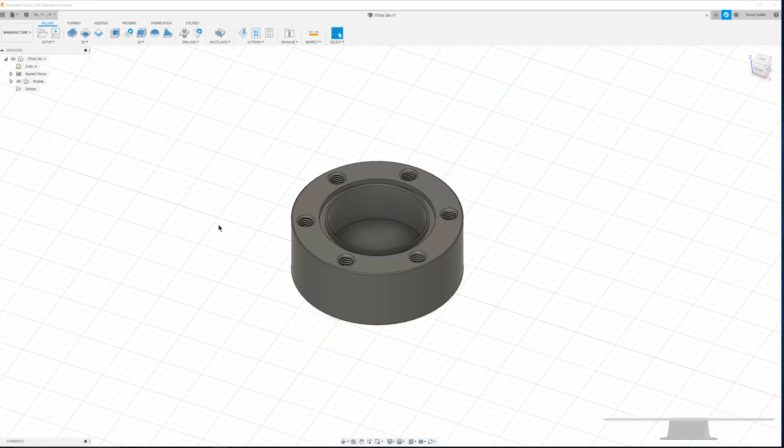Hi everyone, this is Nicole with Titans of CNC Academy, and in this video I'm going to show you how to program the TITAN-3M for the Tormach.

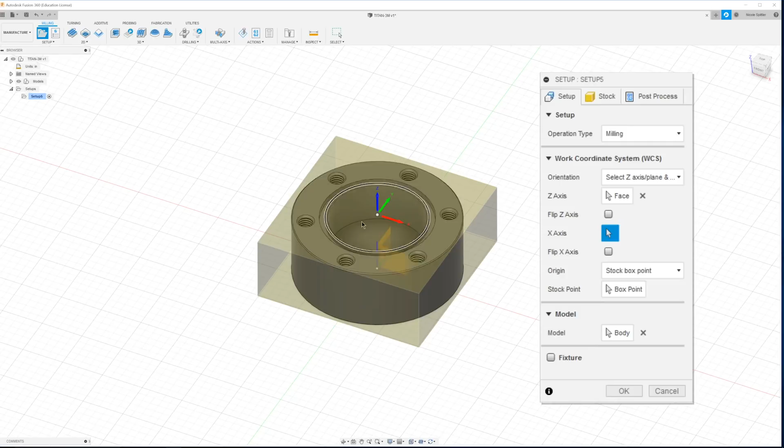To begin, we need to set up our stock, so I'm going to click Setup up here. We need to change our orientation to select Z-axis plane and X-axis. For our Z-axis, I'm just going to select this top face. For our X-axis, since there are no lines or edges going along X, I'm just going to zoom out and you can see our origin actually grows, and I can now select that for our X-axis.

Next, I want to change our origin to stock box point, and with stock point highlighted blue, I want to select this back left point. Next, in our stock tab, I want to make sure our mode is set to relative size box, and our stock offset mode is going to be add stock to all sides. Now I'm going to add 0.025 to each of our sides, both on X and on Y.

For our negative Z, I'm going to add 0.23, and for our positive Z, I'm going to add 0.02. And you can see our stock dimensions are 2 by 2 by 1. And now I'm going to click OK.

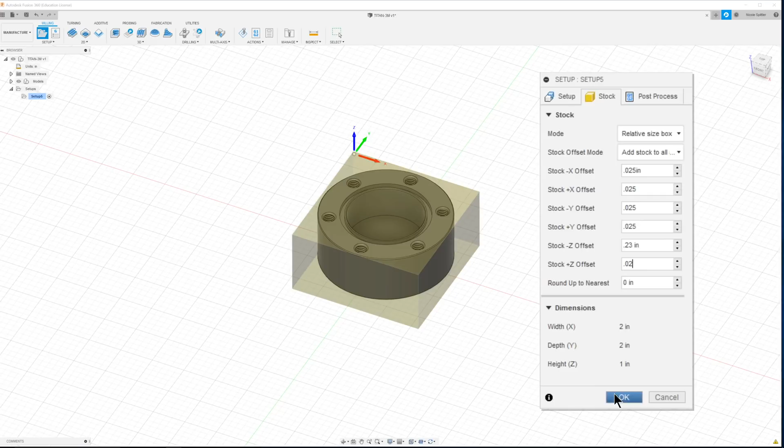The next thing we want to do is face our part, so to do that I'm going to come up to 2D and down to face. We're going to select our tool from the library. The tool we want is the 1.5 inch face mill that we created in the TITAN-3M Tormach video. Click OK.

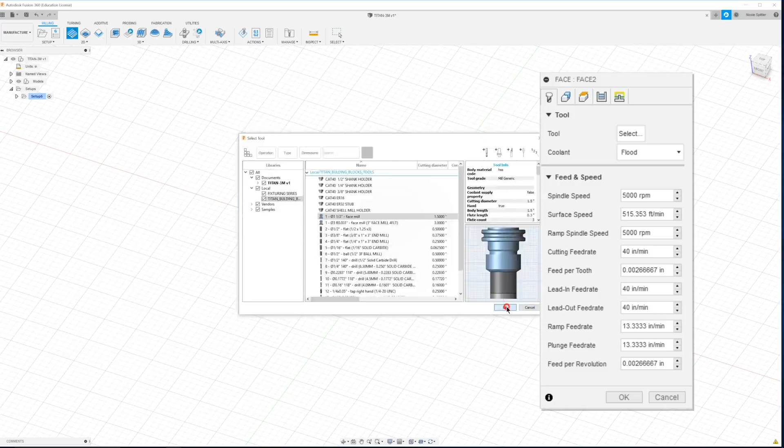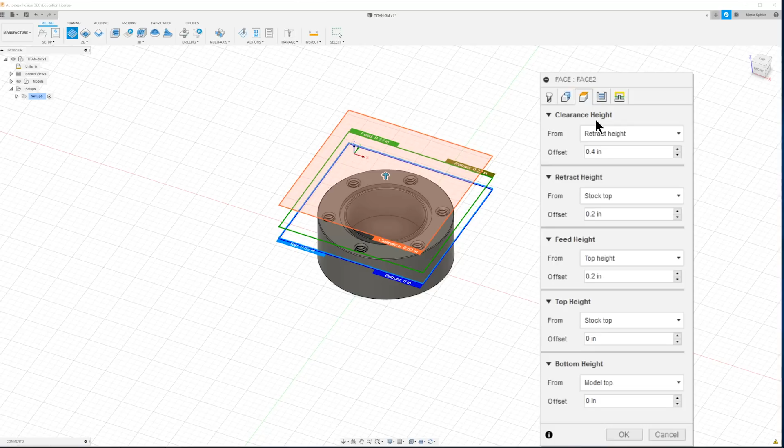I'm going to change our RPM to 4,000, and our cutting feed rate to 20 inches per minute. I'm going to do my lead in, lead out, ramp, and plunge all 20. We don't need to select anything in geometry, so I'm just going to move on to our heights tab. In here, I'm going to change everything to model top.

And in our passes tab, I'm going to change our pass direction to 180 degrees, our pass extension to 0.76, and our step over to 1.4. Our direction we are going to set to climb, and now we can move on to our linking tab. In here I don't really need to change anything. I am going to uncheck our lead in and our lead out and click OK.

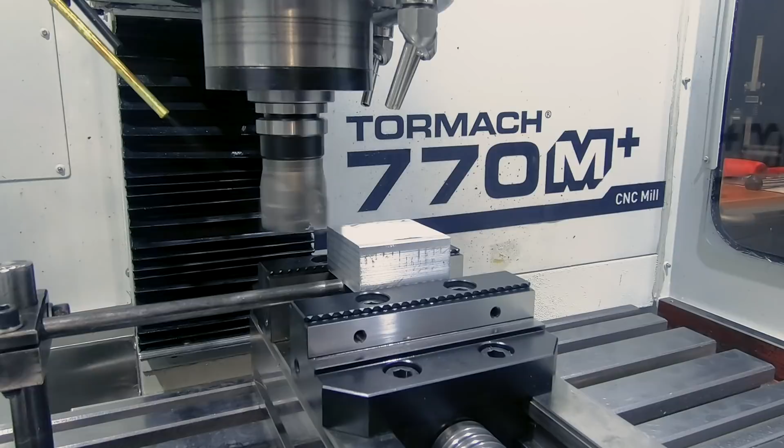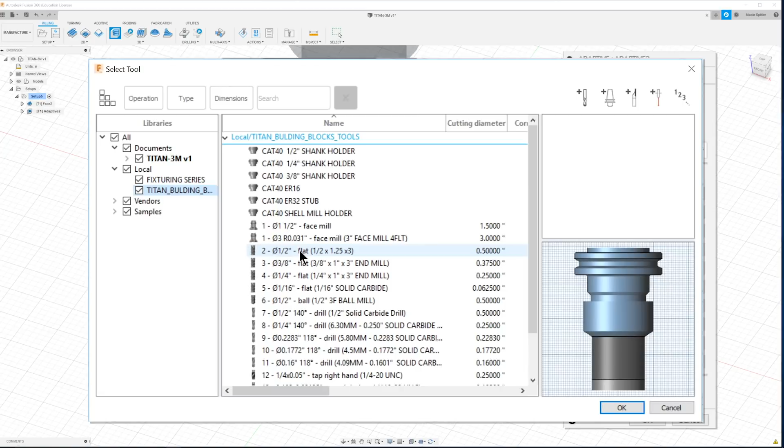The next thing we need to do is rough out our part. So to do that, I'm going to go up to 3D and down to adaptive clearing. And we're going to select our tool from the library. This time we're going to be using the 1/2 inch flat end mill. I want our spindle speed set to 4,000 RPM, and our cutting feed rate is going to be 25 inches per minute.

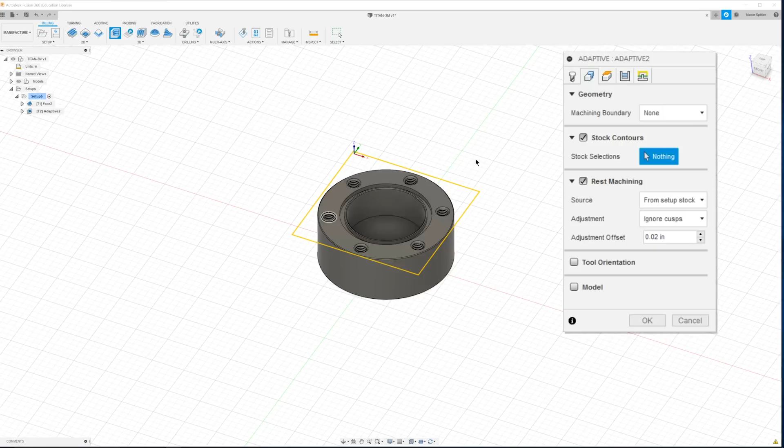I'm going to do my lead in and lead out 25, and I'm going to do my ramp and plunge 15. We don't need to select anything in the geometry tab, so I'm just going to leave it all to default. In our heights tab, I want to change everything to model top. And for our bottom height offset, I'm going to do negative 0.77 below the top.

Next, in our passes tab, I want to set my optimal load to 0.025. I'm going to set my maximum roughing step down to 0.8. Our fine step down can be 0.08. I'm going to check flat area detection, and 8 thou is fine with that. For our stock to leave, I'm going to do 5 thou.

Next, in our linking tab, I want to set our retraction policy to minimum, our stay down level to 70%. We can actually bump up our non-engagement feed rate to 90 inches per minute. And for our helix, I'm going to do 1 degree ramping angle, and I'm going to do a 1 degree taper angle, and the rest I'm going to leave to default and click OK.

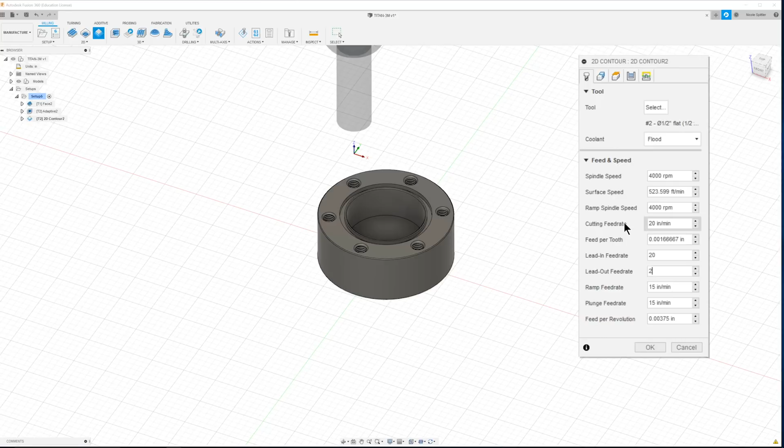So the next thing we need to do is finish our pocket. So to do that, I'm going to come up to 2D and we're going to actually use a 2D contour. So we're going to use that same 1/2 inch flat end mill, but I'm going to change my feed rate to 20 inches per minute. And in our geometry tab, I'm just going to select that bottom contour of our pocket.

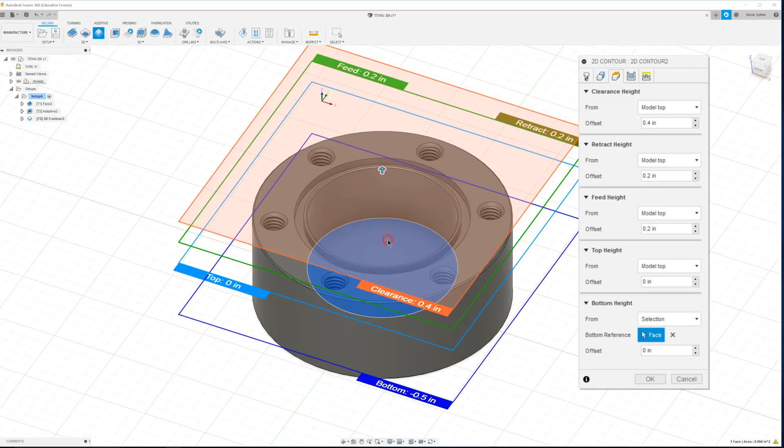Next, in our heights tab, I want to change everything to model top, except for our bottom height, I'm going to do selection, and I'm just going to select the face of that pocket. Next, in our passes tab, I want to change our compensation type to wear. And I'm going to do a finish overlap of 0.01.

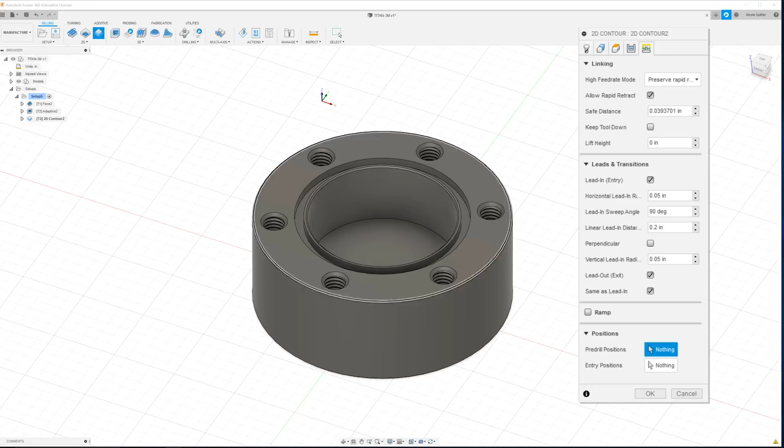In our linking tab, the only thing I'm really going to change here is our lead-in distance to 0.2. And that'll have it kind of start in the middle and clean that center up real good. Next, I'm going to click OK.

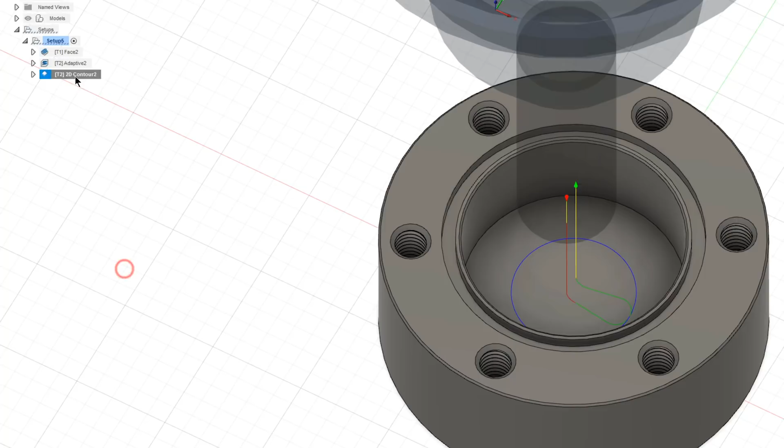Now the next thing we need to do is finish the outside of our part. So I'm just going to go ahead and duplicate that last toolpath. Right click duplicate, I'm going to right click the new one and click edit. I'm going to keep all my feeds and speeds the same. In geometry, I do want to close this current contour selection, and I'm going to select this outer bottom profile.

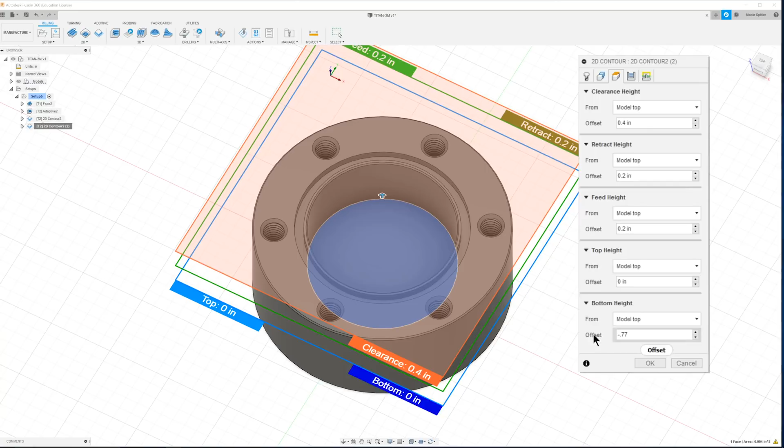In our heights tab, I do want to change our bottom height to model top. And I'm just going to do a bottom height offset of -0.77. And I don't really need to change anything on our passes tab, so I'm going to leave that to default. I'm going to go over to our linking tab, and I'm just going to change this back to 0.05. And click OK.

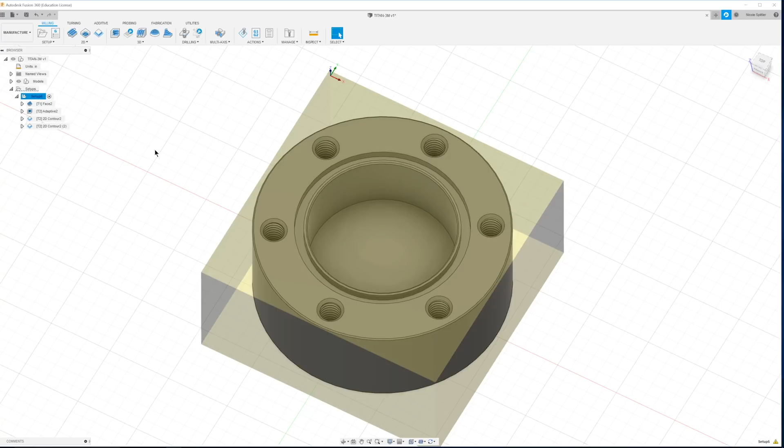So the next thing we need to do is start on our O-ring groove here. So to do that, we're going to do a 2D contour. So I'm going to come up to 2D, down to 2D contour, and we're going to select the tool from our library. We're going to use a 1/16 inch flat end mill. So I'm going to select that and click OK. Our spindle speed will be 4,000 RPM. Our cutting feed rate is going to be 7 inches per minute. I'm just going to change them all to 7.

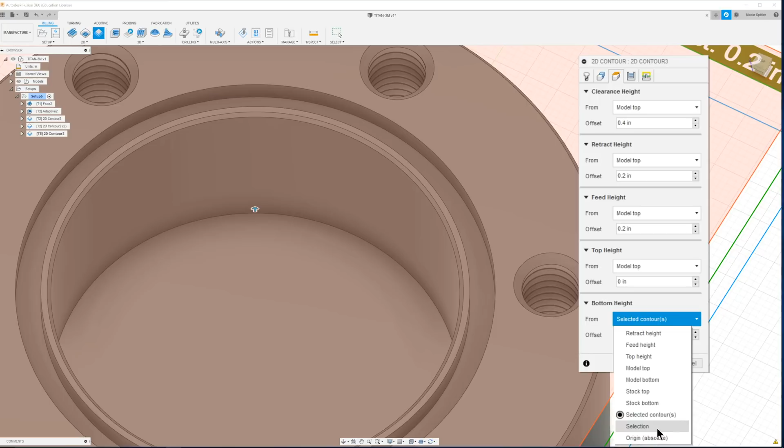In our geometry tab, I want to select the outer bottom of our O-ring groove. Next, in our heights tab, I want to change everything to model top. Except for our bottom height, I'm going to change that to selection. And I'm just going to select the bottom face of our O-ring groove.

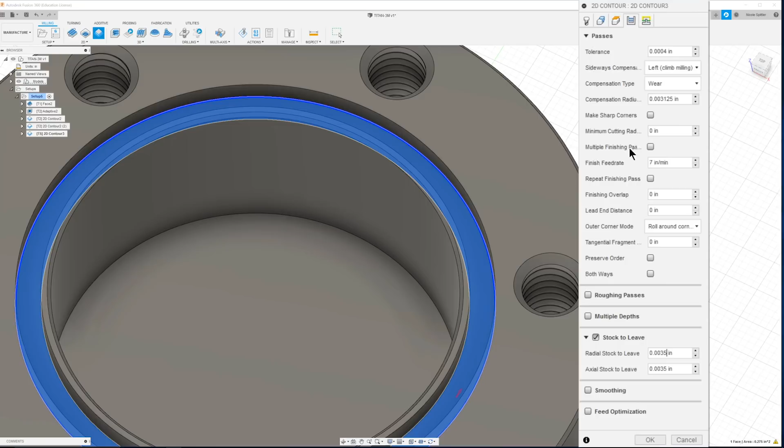Next, in our passes tab, I want to change our compensation type to wear. And I want to select stock to leave, and I'm going to change that to 3.5 thou. That'll put the tool kind of in the center here, and it'll allow us to be able to finish the sidewalls later. Next, in our linking tab, I want to change our horizontal lead-in radius to 1/10.

And the same thing with our linear lead-in distance. And I'll set our vertical lead-in radius to 0. Next, we want to check the box that says ramp. And we want our maximum ramp step down to be 0.03. Our ramp clearance height is going to be 0.02. And click OK.

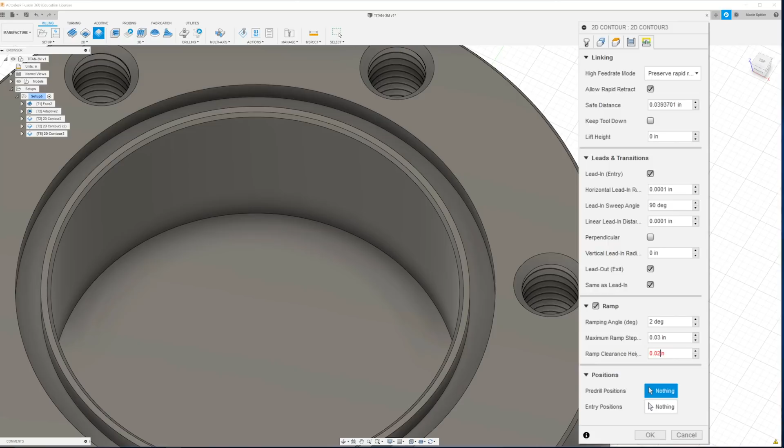Now we can finish the sidewalls of our O-ring groove. So to do that, I'm actually going to duplicate our last toolpath. And I'm going to right click, edit the new one. I'm going to change our plunge to 3 inches per minute since we're going to be plunging into a little bit of material. I'm going to go ahead and leave our contour selection the same. And none of our heights need to change, those are fine.

In our passes tab, I want to turn off our stock to leave, and we can actually add a finish overlap of 0.01. And in our linking tab, I'm gonna actually turn off the ramp, and I'm just gonna change these to 1 thou. Now I'll click OK.

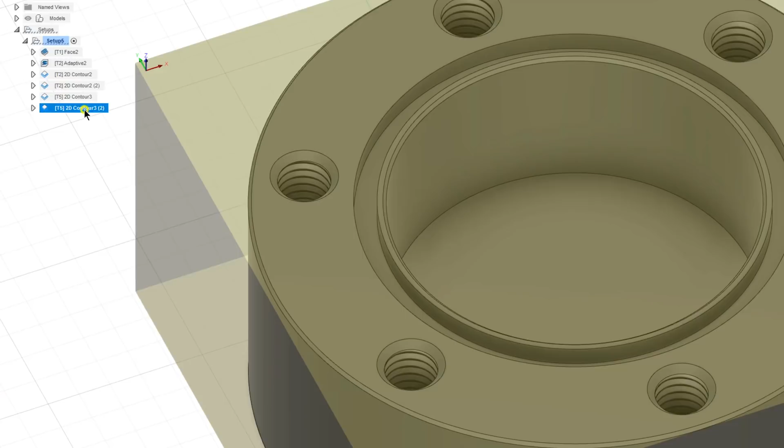So to finish the inside of the sidewall of our O-ring groove, I'm just going to duplicate this last toolpath. And the only thing we're really going to be changing is just our geometry selection. And I just want to select the inside of our O-ring groove. And we'll click OK.

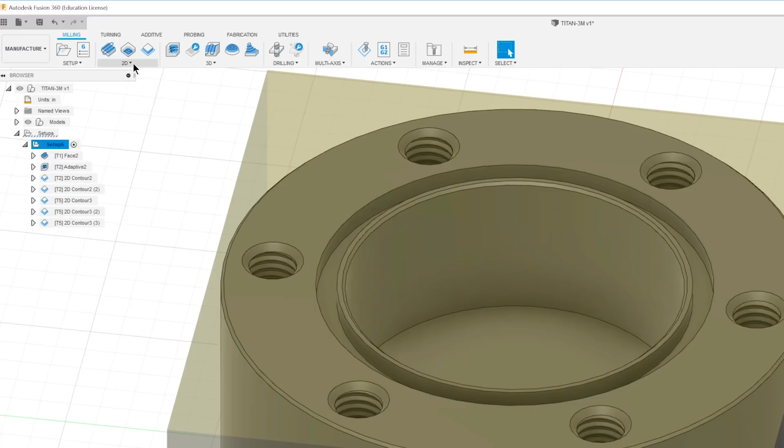So the next thing we need to do is chamfer the top of our part. So to do that, I'm going to come up to 2D and down to 2D chamfer. And we're going to select the tool from our library. We're going to use a 1/4 inch chamfer mill. So our spindle speed is already set to 4,000 RPM and our cutting feed rate is set to 20. I'm just going to change all of these to 20 as well.

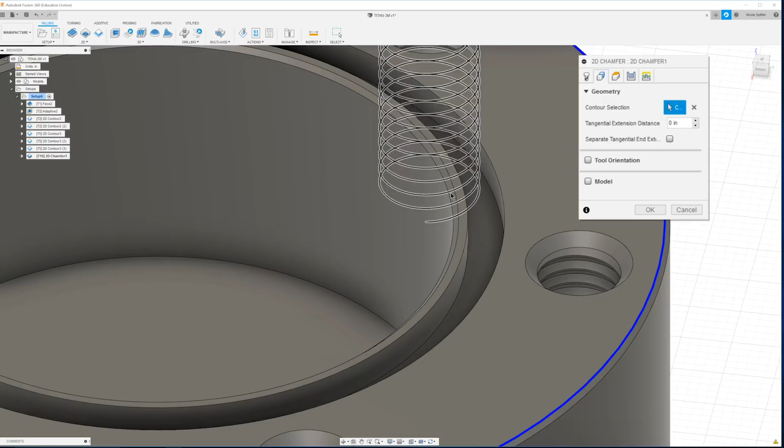In our geometry, we want to make sure that we select the top contour of our modeled in chamfer. So we don't want to select this outer one, we want to make sure it's the very top of our chamfer. Same with this inner one here. We want to make sure that we select the top line. Next, in our heights tab, we just want to change everything to model top.

Now we can move on to our passes tab, and in here I want to change my compensation type to wear. And our chamfer width is going to be 0 since it's already modeled in. I'm going to do our chamfer tip offset at 0.05, and I'm just going to set our clearance to 0. In our linking tab, I'm going to change our horizontal to 0.05, our linear to 0.05 as well, and our vertical is going to be set to 0. And now we can click OK.

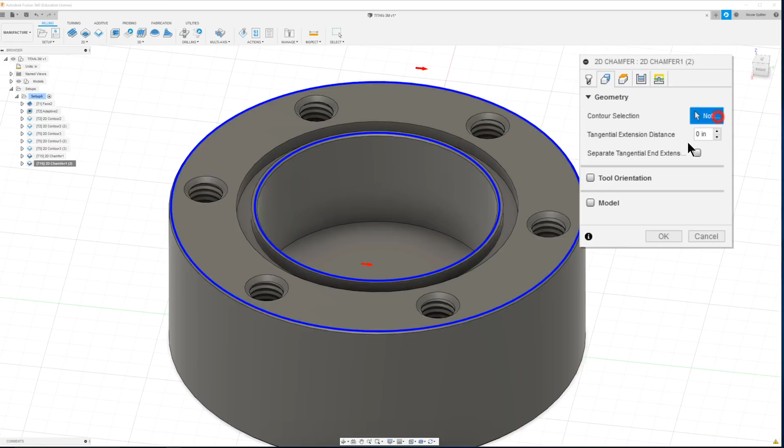The next thing I want to do is add an edge break to our O-ring groove, just to kind of clean up any burr that's going to be left over from the end mill. So to do that, I'm actually going to duplicate this last chamfer, and I'm going to edit the new one. For the geometry, I'm going to remove this current contour selection, and I'm just going to select the top edges of our O-ring groove. Our height should all remain the same.

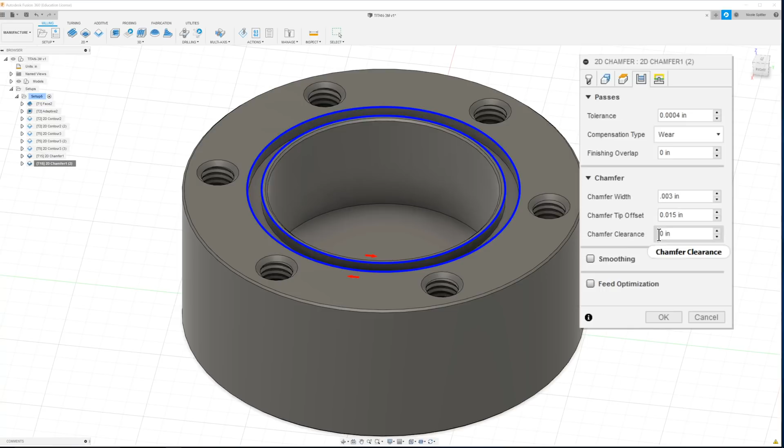In our passes tab, I do want to add a chamfer width since it's not modeled in. I'm just going to do 3 thou. Our chamfer tip offset, I'm going to do 0.015. And our chamfer clearance is going to remain 0. Next, in our linking tab, I want to change these guys to 5 thou for our horizontal and our linear. And then our vertical lead-in radius will be set to 0 still. And I'll click OK.

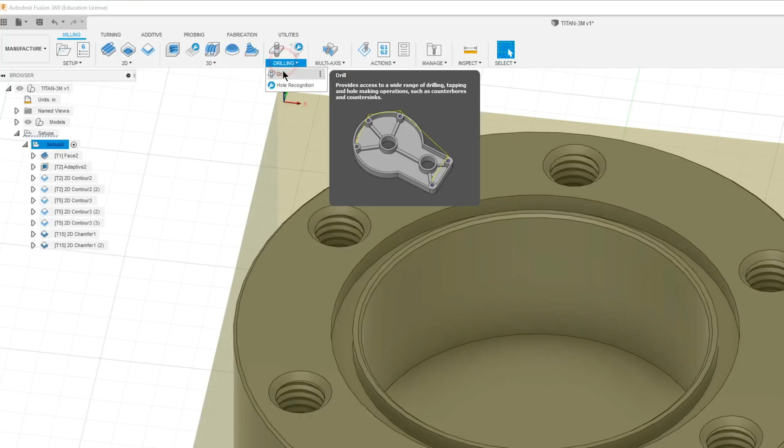So the next thing we need to do is spot drill all of our holes. So to do that, I'm going to come up to drilling and select drill. Now we're going to be using this 1/4 inch chamfer, so I'm going to leave that in there. We're going to be running it at 4,000 RPM with a 20 inch per minute plunge feed rate. I'm just going to change that to 20 inches per minute for the retract.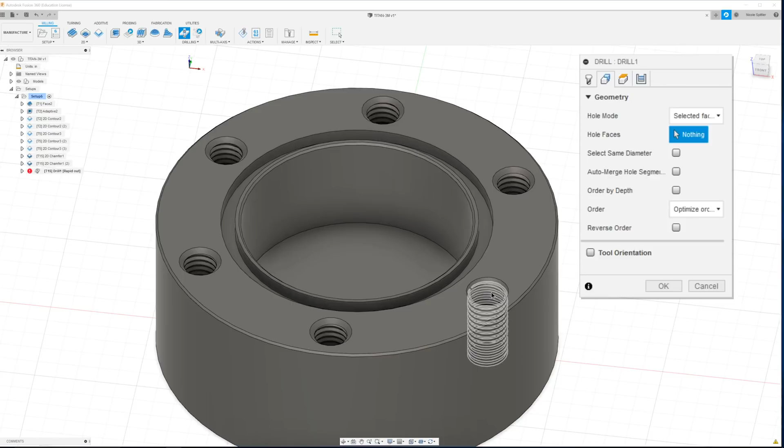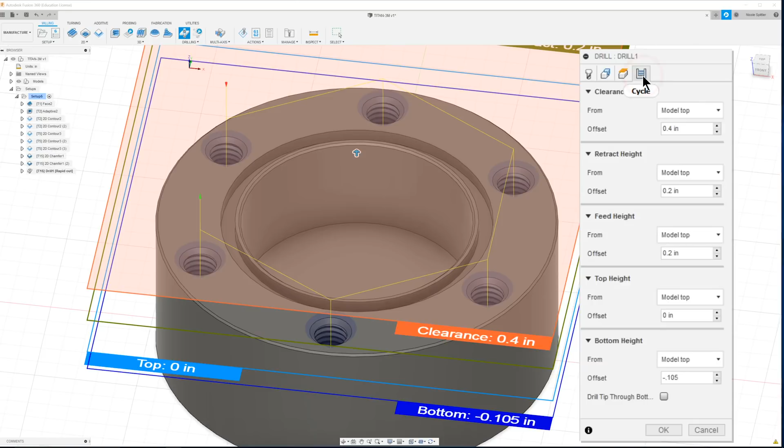In our geometry, we want to make sure our hole mode is set to selected faces. And with our hole faces highlighted blue, I just want to select one of these holes. And then next we want to make sure we check the box that says select same diameter. And that should select all of our holes for us. Next, I want to move on to our heights tab. In here, I want to change everything to model top. And I'm just going to change our bottom height offset to -0.105. In our cycle, we want to make sure our cycle type is set to drilling, rapid out, and click OK.

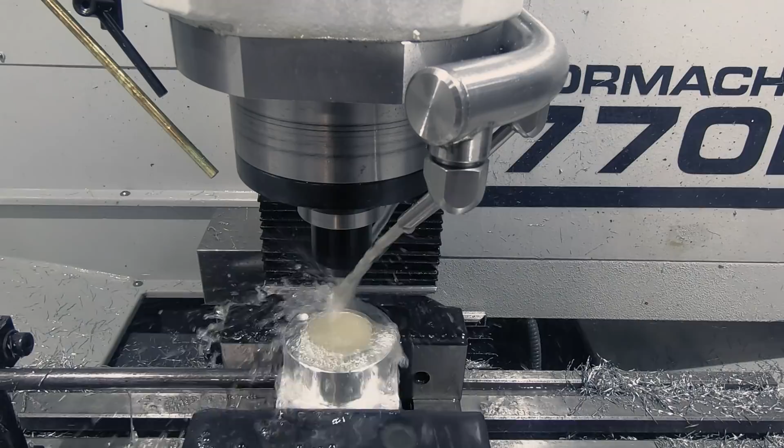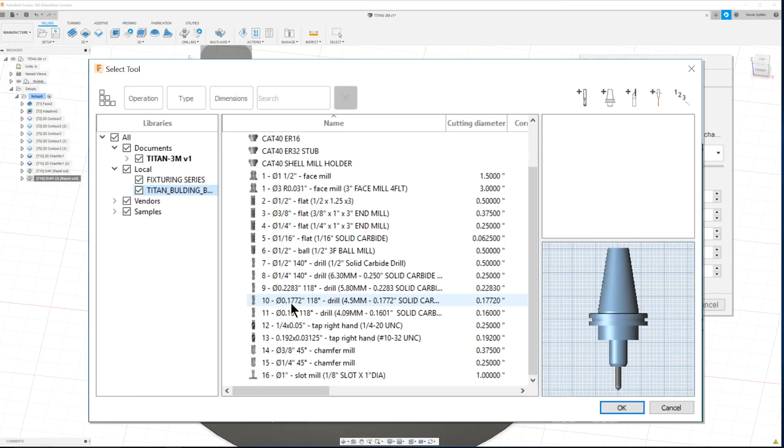The next thing we need to do is drill all of our holes. So to do that, I'm actually just going to duplicate this last toolpath, and right click and edit the new one. We'll come up to our tool tab and we're going to select our tool from the library. We're going to be using this 0.1772 drill. And we want 4,000 RPM with 16 inches per minute for our plunge feed rate. Our geometry is already selected, so we're going to move on to our heights tab. In here, the only thing I need to change is our bottom height offset is going to be -0.65.

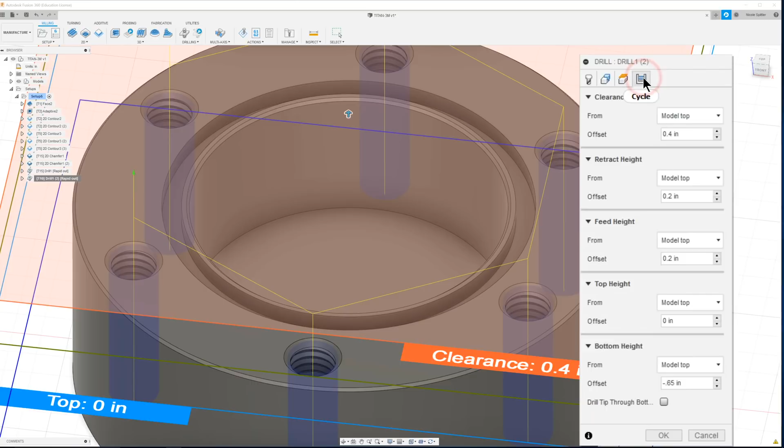And in our cycle tab, we want to change our cycle type to chip breaking with a partial retract. And I'm going to change our pecking depth to 0.05. We'll change our minimum pecking depth to 0.025 and our accumulated to 1 inch. I'm going to add a chip break distance of 0.01 and click OK.

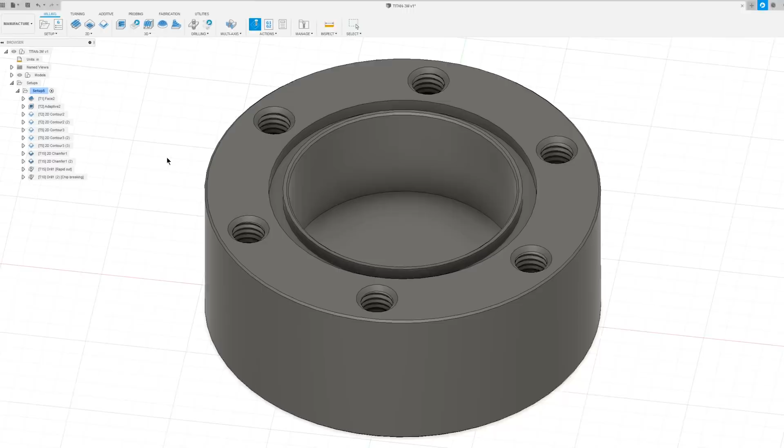Now the last thing we need to do is tap all of our holes. So I'm just going to go ahead and duplicate that last toolpath again, and right click, edit the new one. And we're going to come up to our tool tab and I just want to select our tool from the library. We're going to be using the 10-32 tap, so I'll select that and click OK. For our spindle speed, I want to change that to 550.

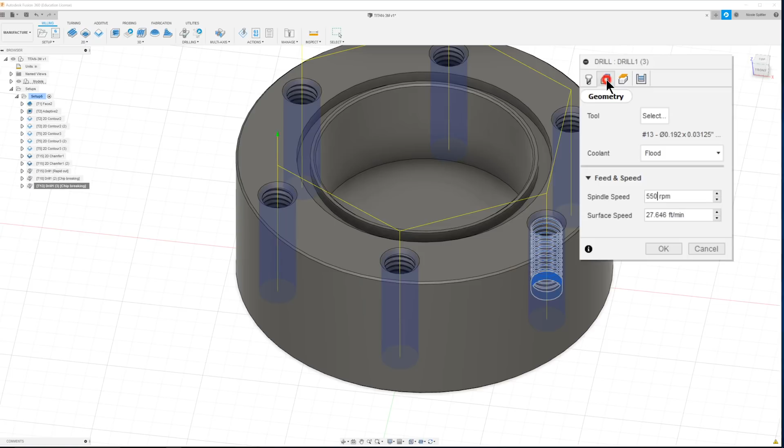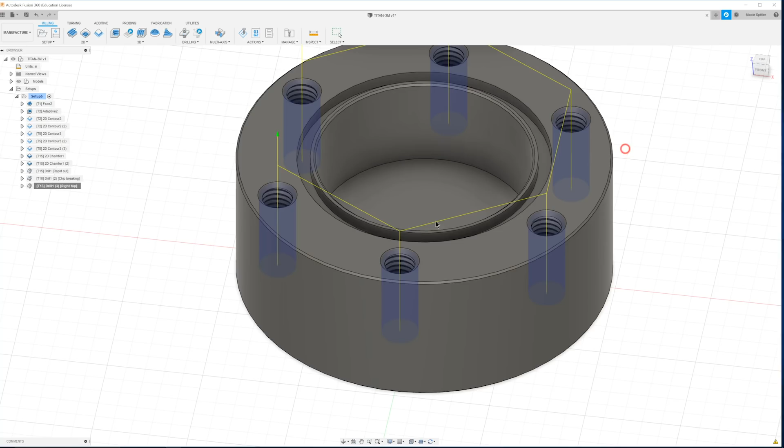And since our geometry is already selected, I'm going to move on to our heights tab. In here, I want to change our bottom height offset to -0.475. Next, we'll move on to our cycle tab, and I want to change our cycle type to right tapping. And now we can click OK. Now the programming for this part is complete.